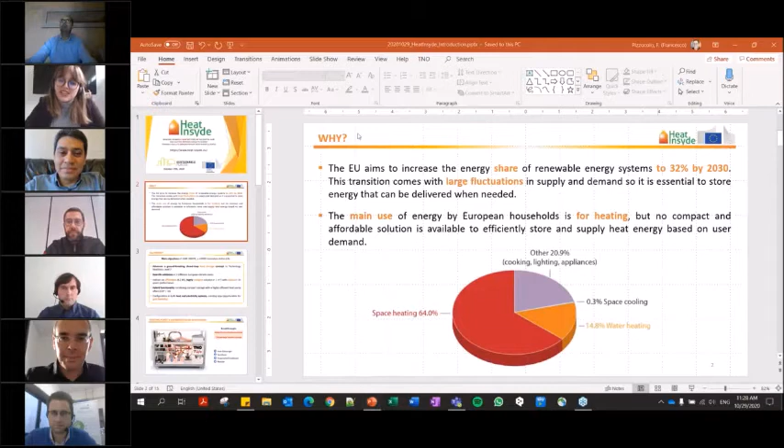Next speaker is Francesco Pizzocolo, Project and Transition Manager at TNO, the Netherlands Organization for Applied Scientific Research. Francesco got his master's at the University of Brescia in Italy in 2008 as a civil engineer. And during his career, he developed a broad knowledge about materials behaviors in different fields: energy, pharmaceutical, biomedical, and automotive.

So after working as a researcher for 4 years at the Eindhoven University of Technology, in 2013 he moved to TNO as a scientist in the Applied Geoscience Group. And since 2017, he is a project manager in the Material Solutions Department. Francesco is responsible for many projects in the energy sector with focus on materials performance.

And in his free time, he is a basketball head coach at national level. That's very impressive as well. So please, Francesco, the floor is yours. Thank you, Ines, for the introduction.

I'm the project manager of the Insyde project, so I'm not really involved in the technical development, but more in the management, marketing, and the business side. So Insyde is a shortcut for bringing advanced heat batteries in residential heat and electric systems close to market through real-life demonstration in different climates. So it was very nice to see the presentation of Carlos, because we are trying to develop a similar concept using thermochemical materials.

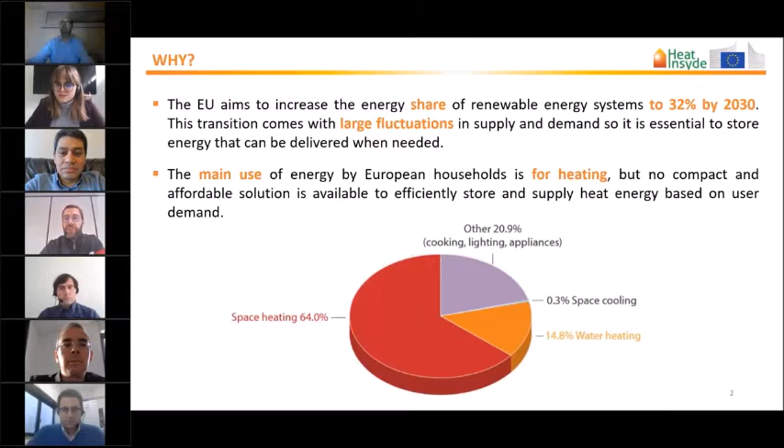So the whole project started because the EU aims to increase the energy share up to 32% in only 10 years' time. But of course, this transition comes with big fluctuation in supply and demand. So it's really important to have a system that can store energy and deliver it when needed. As most of the audience will know, the main use of energy in the household is for heating. In Europe, it goes up to 64%. But at this moment, on the market, there is no compact and affordable solution to efficiently store and supply heat based on the user demand.

So the main objective of our project is to advance this groundbreaking closed-loop heat storage concept to technology readiness level 7, and then to go through a real-life validation in 3 different European climate zones. And so at the end, we really like to deliver an affordable solution, in the range of 8,000 euro, and a compact solution with robust performance that will last more than 25 years. So combining hybrid functionality with compact storage with a highly efficient heat pump, and then to have a configuration for both heat and electricity systems to create new opportunities for grid flexibility.

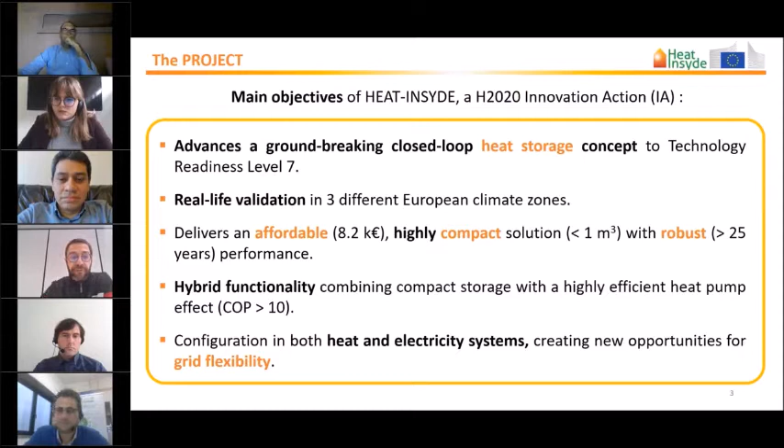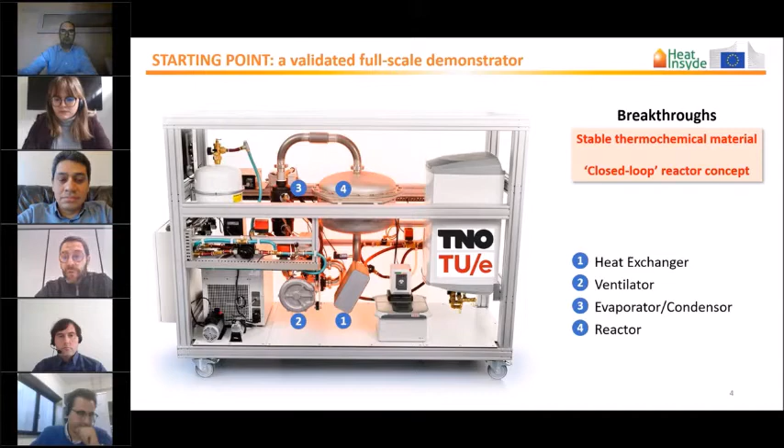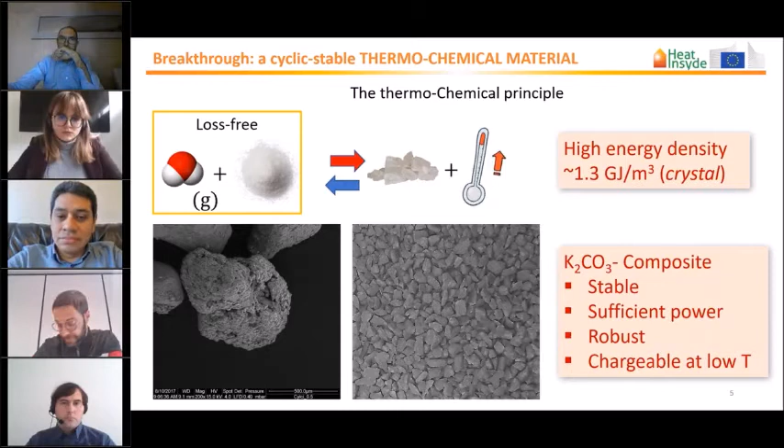So there are 2 main breakthroughs in our technology. We are using a very stable thermochemical material, and a very robust closed-loop reactor system. This thermochemical material is loss-free. This means that it is very stable when the water is hydrated. So when it's a salt, and the water is stuck in the crystal, it maintains a very good energy density and no energy is lost. So it's stable, has good power, is robust, can last for many years. It is very environmentally friendly, and to charge it a pretty low temperature is enough.

So it is a very simple system. It has only 4 key components. On the top right is the reactor, where the thermochemical material is stored. And during the project, we are now finalizing the design of an optimized system that is smaller and more efficient. Then below the reactor, there is the heat exchanger, then the ventilator, and on the top left, there is the evaporator and condenser.

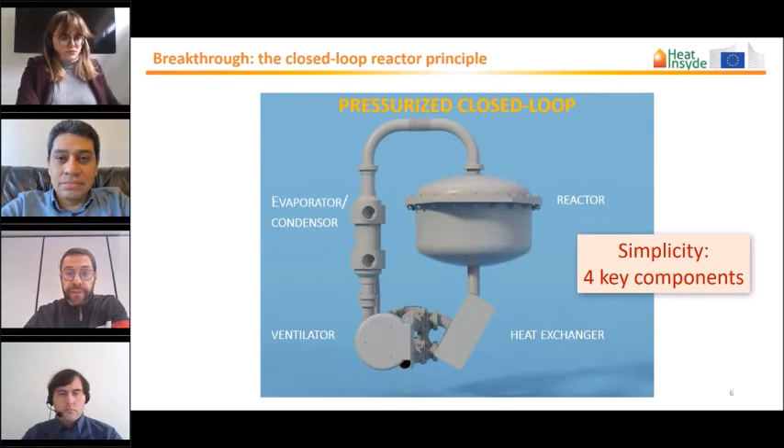So how does our system work? We have a discharge and a charge phase. In the discharge, the cold air goes through the evaporator and becomes wet, and then it enters the reactor, and the reactor gives as output warm, dry air. During the charge phase it is the other way around. The battery, to be charged, needs an inlet of warm, dry air, which goes through and becomes cold, wet air, and then dry air, and so on. So this system is quite robust, it has already been tested for several cycles, and is very stable.

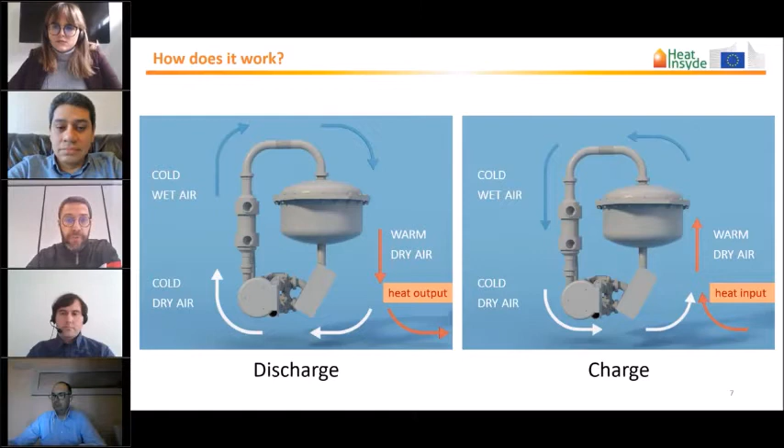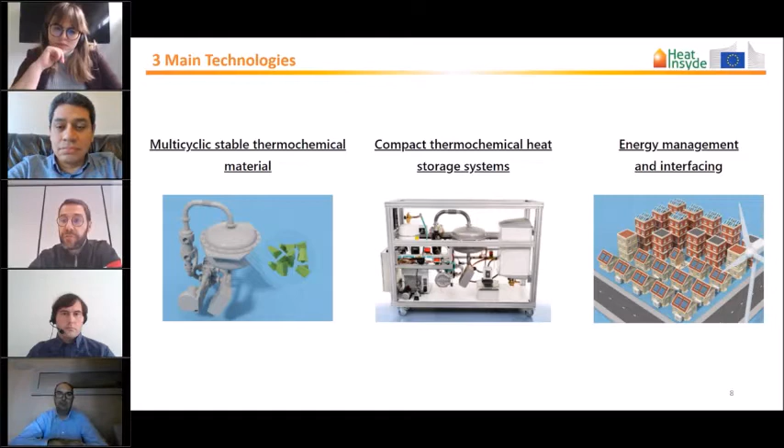So what we are combining is three main technologies. We have a multi-cyclic stable thermochemical material, the salt. Then we combine it with a compact thermochemical heat storage system, and then we interface with the energy management of houses or house complexes.

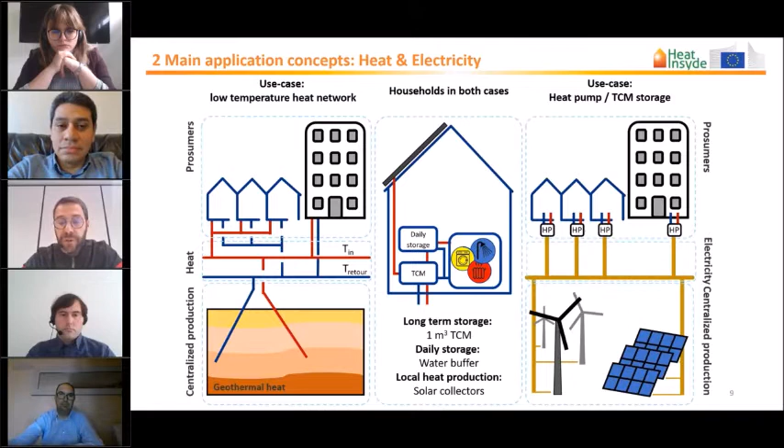Then we are working on different use cases. The house can be connected to a low temperature heat network, for example with a centralized production of geothermal heat. So there is a low temperature inlet in your house that you can use to charge the battery. Or there is a use case in which the heat pump is connected to your thermochemical storage system, and the electricity has a centralized production that can come from solar panels or wind turbines, for example.

So we have 3 pilot demonstrations in different climates. So the project started 1 year ago. We had this week our first general assembly, and the new reactor system will go in production around May, June in 2021. There will be some extra tests and optimization that have to be done before, and then we're gonna build several machines that are going to be installed in the spring of 2022 in 3 different locations.

So there will be 2 houses in Eindhoven, the Netherlands, with temperature ranging from 4 to 22 degrees, and hours of sunlight 2 to 7 hours a day. One is going to be in a very nice location in the south of France, in Saint-Paul-les-Durance, with temperature ranging from 7 to 25 Celsius, and 5 to 12 hours of sunlight. And the last one is in Poland, in the north of Poland, Gdansk, with temperature ranging between -3 and 18, hours of sunlight, 1 to 8.

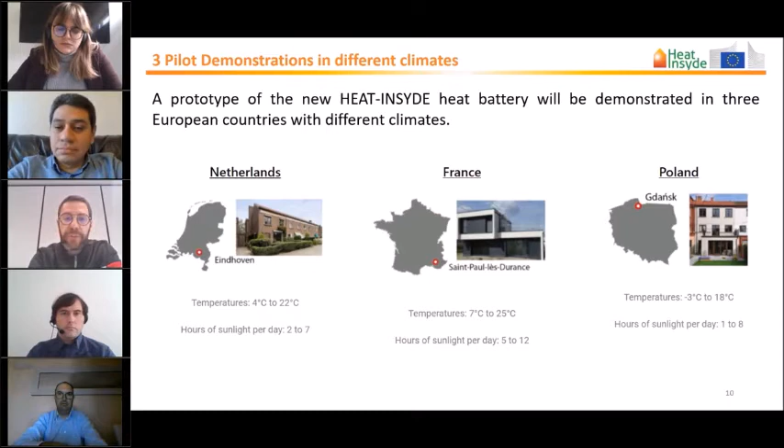The last year and a half of the project is really going to be focused on installing first the machine at the demo sites, and then collecting as much data as we can about performance of the reactor, the material, and the energy consumption of the houses. So we will integrate our system with a heat pump solar collector. So the air side of the heat pump is combined with solar panels, and then there's going to be a smart integration of the condenser side in the heating system, and also a direct electrical charging.

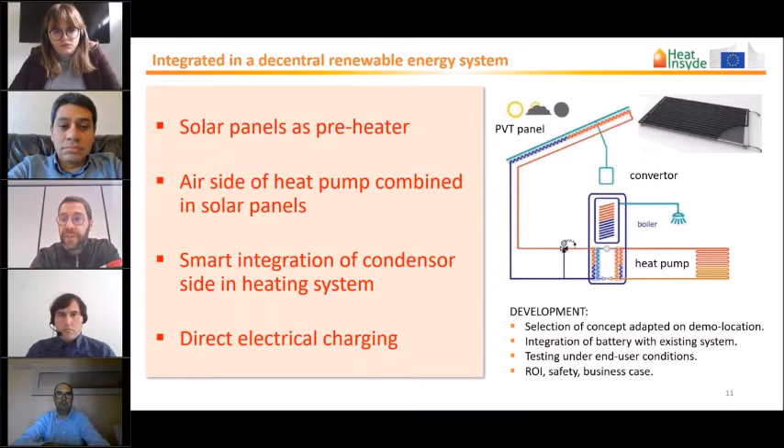So what is in development now: we have a selection of concepts that we have to adapt to the demo location. Then we will have to integrate our battery with the existing system, because of course some renovation of the house will be necessary, but we want our system to be as flexible as possible to be easily adaptable to all kinds of different houses. Then it will be tested under real end user conditions. And then we are developing all the ROI, safety, business case, and life cycle assessment.

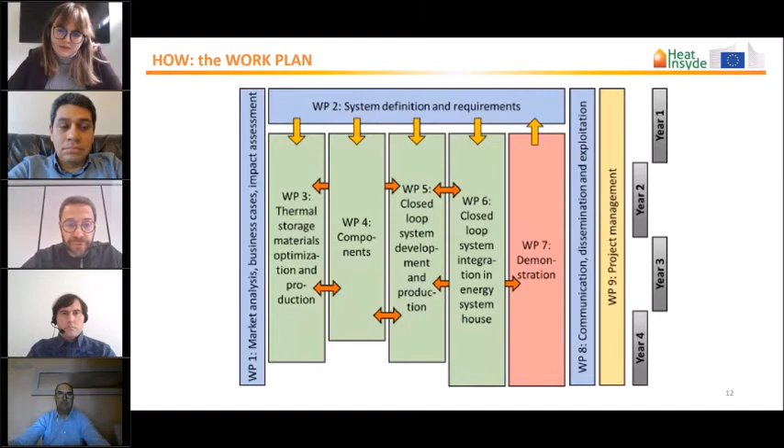So this is our work plan. I don't want to spend much time on this. I just want to show you that every part of the system is strongly connected. So the material development, for example, needs to go hand in hand with the reactor development. So we have a strong collaboration between all partners, and so far as a project manager I can say that I am extremely happy with how the project is developing.

So this takes me to who's in the project. What I find very cool is that we mobilize all the key players for the present and future manufacturing and distribution chain of the heat battery. So the TU/e, the University of Eindhoven, together with Evonik and Caldic, we are working on the industrial material production, material manipulation and optimization. This, for example, involves the best dimension of the thermochemical material piece, the size, the shape, how the air flows inside the system, etc.

Then TNO is also involved in the material manipulation, but also in the optimization of the system design, because we want to make it a bit smaller than it is now, so it can more easily fit in private houses. And then we are also working together with BSOL, Ventilairsec, ENGIE for the network integration. One of our main partners is CEA; they are working with us on the system design, but they also have a very strong role in the network integration and the demonstrator user validation.